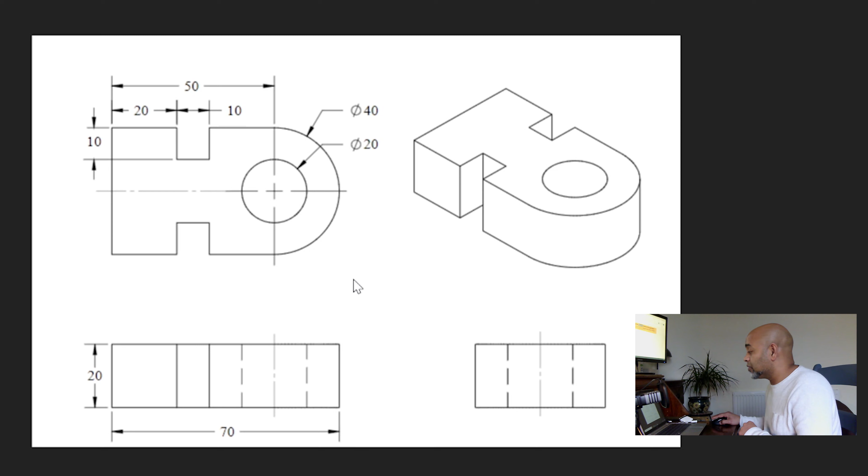I'm going to try and create a version of this whilst I'm running the screen capture for you. First up, I'm going to start with a new part file.

A couple of things about this model: depending on what you're trying to address, you have to select your sketching plane. In this particular case, I think we need our part to grow from the floor up like this, so any cross section you want to draw, you want to draw onto the top plane, and I can see anything I need to draw on the top plane is given by the top view right here.

Okay, so if I were to sketch that profile onto the top plane, I'll then allow it to grow up 20, and in the end, hopefully I will have a result that looks somewhat like this.

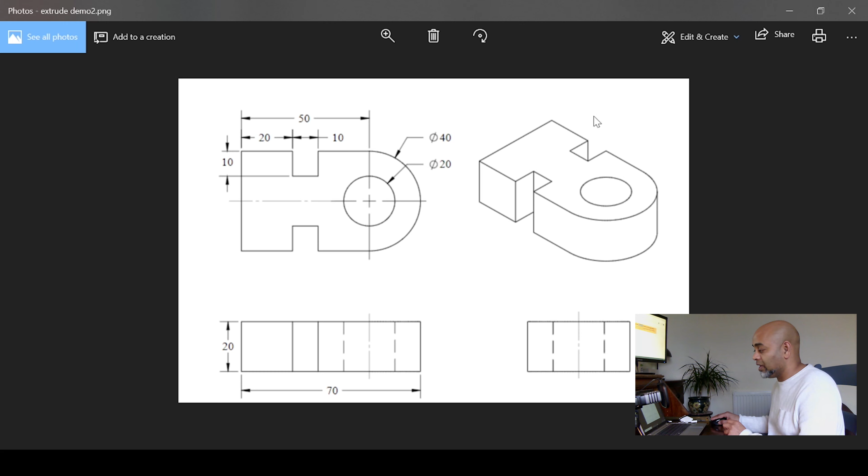I will leave this image hanging onto the rendered video when I finish. Okay, so I'm going to get rid of some of these planes that I don't need, and I'm going to jump on top plane. I know the origin is right there trying to help, and what I wish to do now is

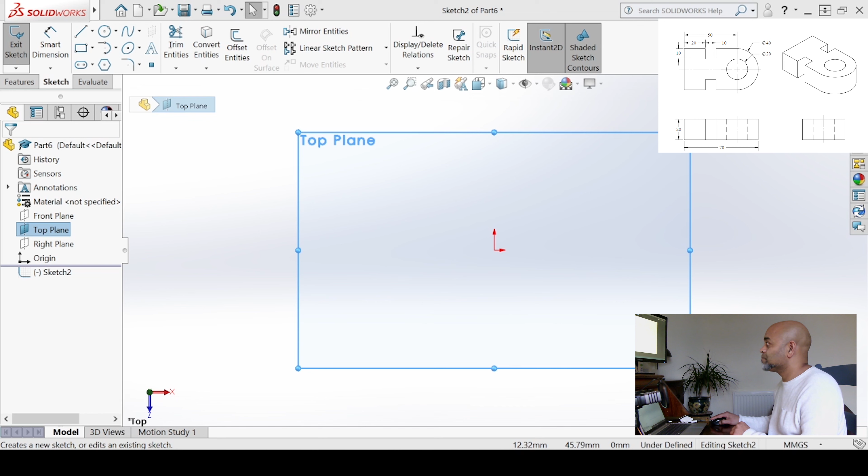sketch the circle, and I'm going to plant that onto the origin. I know the circle is meant to be 20 in diameter, 20 diameter. So that is cute. I like that.

I also need half a circle around here, which I can draw as half a circle, or I can draw a rectangle and fillet the corners out, whichever one you prefer to do.

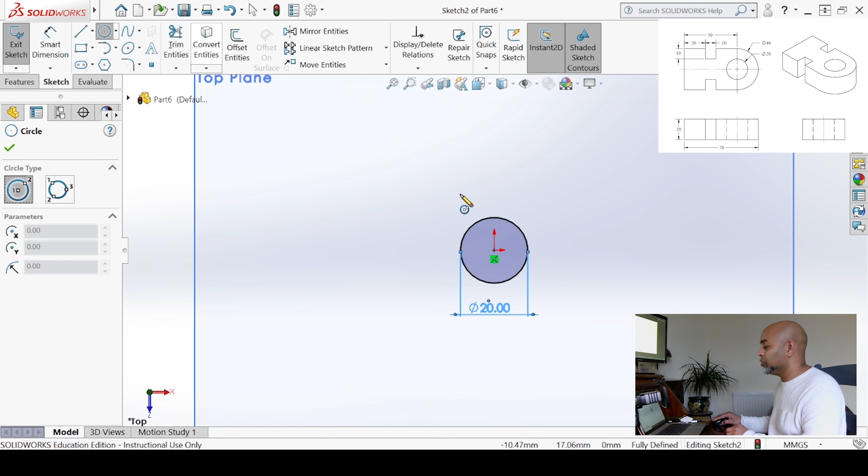So I'm going to go ahead and create a circle that is 40 millimeter in diameter, and then we'll think about chopping the bits which we don't need. So this is 40 mil diameter circle.

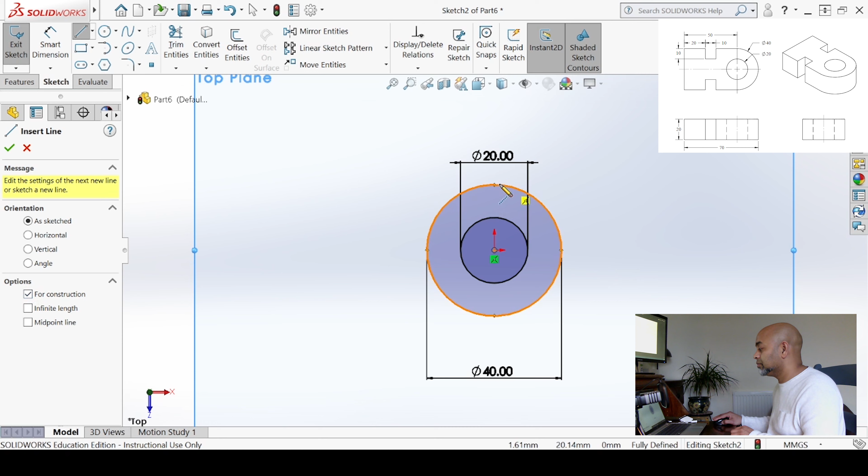Okay, I'm aware of the fact that I will need a construction line just to be able to create that intersection and remove that half circle which I do not really need. Okay, construction line can stay and it's not going to affect our final extrusion.

Now I wish to go ahead and draw myself a rectangle. Sorry, it's not a rectangle. I'm going to start tracing the profile like so,

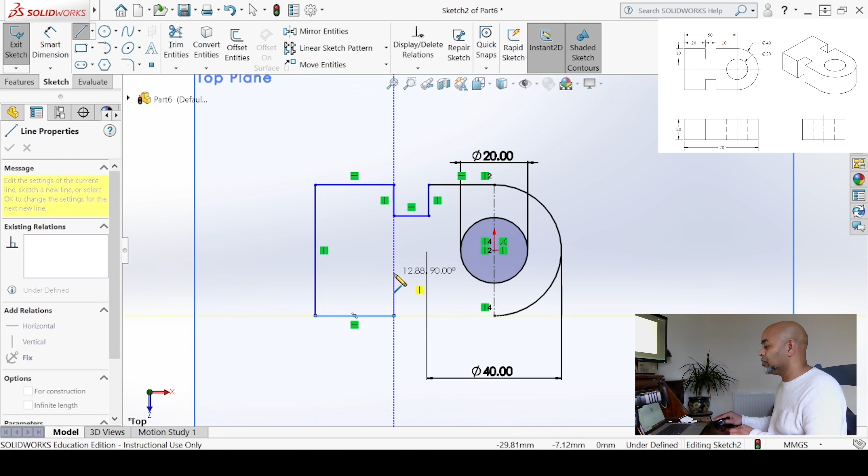without having to worry about any of the dimensions. But there are some things which I'm going to be mindful of. For instance, this, I'm going to commit to that curve relation, and I'm going to commit to this relation here, and all of this helps me draw a meaningful sketch.

As you can see, this is a closed contour. Now all I did is I used the line command and I literally walked around it, clicking wherever I want to click. This is not the final shape I need because all the numbers are all over the place. And now is the time to address those issues.

So for instance, I want the overall distance from the center to this end to be 50, and as you can see, it has readjusted itself to accommodate for that.

I wonder if I can bring these numbers slightly out of the way so I can make space for some numbers that are going to go jump in that space there. Okay, I know distance between these two faces is 10, so I'm going to go do that.

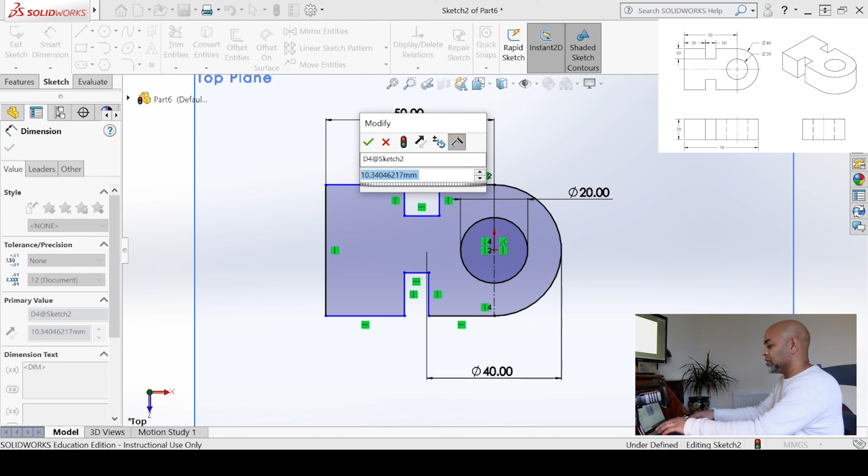I also know this is going to be 20, so I'm going to make it nice and in line with that 10 there as much as I can.

I don't need to worry about the overall height because that is same as the diameter of our object. Now there are a couple of things which are slightly off here. The fact that I haven't specified the depth of this cut, so I'm going to say

that is 10 millimeter. Now then, you may wonder, well, we have got all the dimensions, but it's not fully defined yet. Why is that? That's because I haven't fully constrained that.

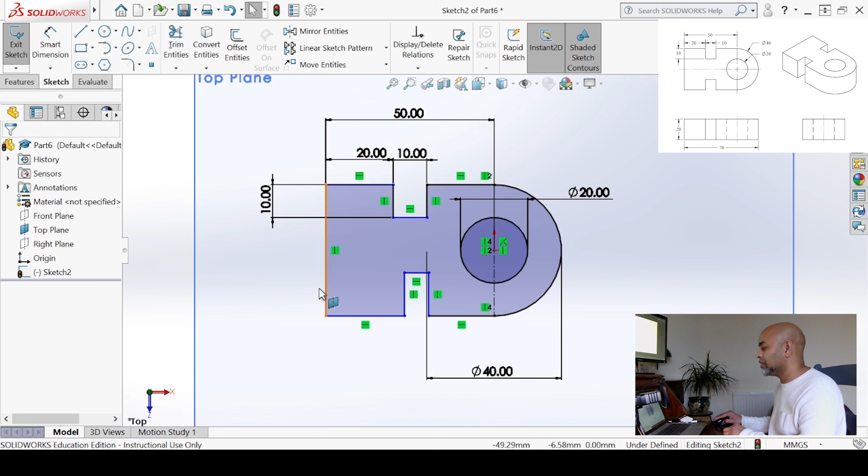There are a few unknowns here. For instance, I haven't finished detailing this end here. Let's do that now. How about if I were to say this line here,

holding down control, this line and these two little lines, they are equal in length. Excellent. So I've created that equal relationship.

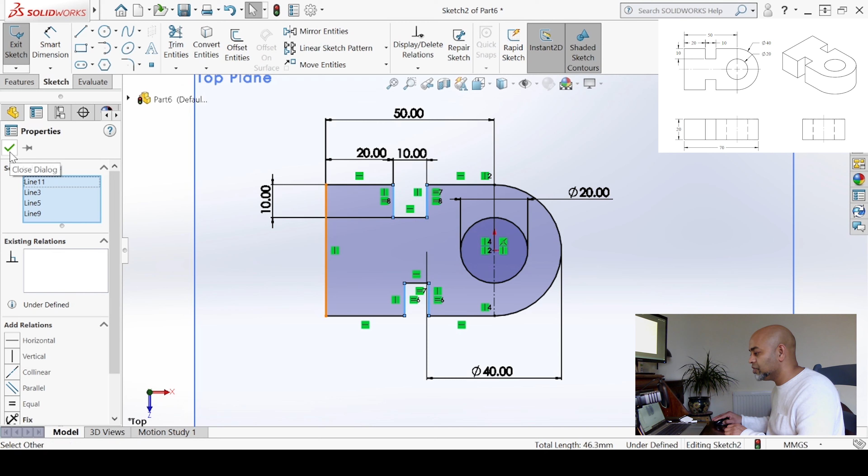Whilst I'm on the case, I would also like to make sure these two lines are collinear. So I'm going to select that line, control select the other line and make them collinear so they line up correctly. Okay, green tick to confirm.

And if you're still in doubt, you're always more than welcome to grab the blue line just to get a good idea of why it is moving or why it is undefined. And if I were to do that, it will be all clear. So I haven't restricted that line to stay under that.

So I'm going to go and do exactly that on this side here. Select that, control select the other end and make it collinear. Green tick to confirm. And if I look at the message here, that says fully defined.

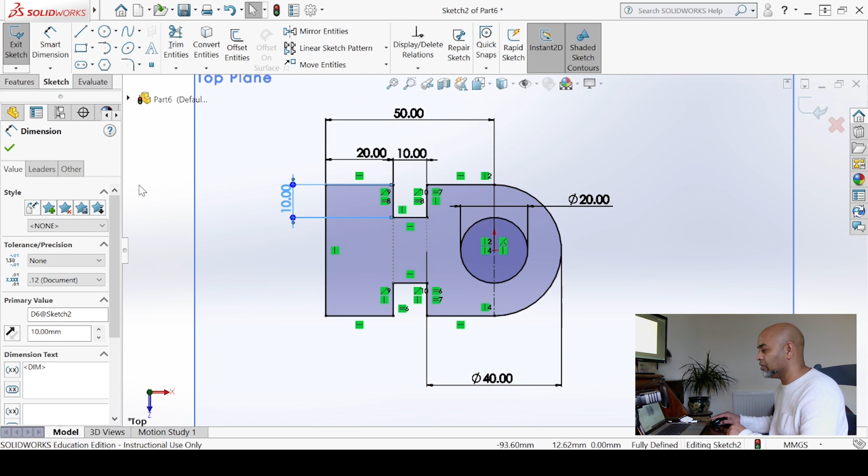What that really means is we've done a great job in terms of sketching this, probably slightly complicated because I was taking it slow with a step-by-step approach. I could have mirrored some of those, but we'll look at those in some detail later. For the time being, I think this is a good profile and we are good to extrude this.

Look at that. Extrude boss base. And I'm expected to pull it out of the ground 20 mil high, green tick to confirm, and this is the model I needed.

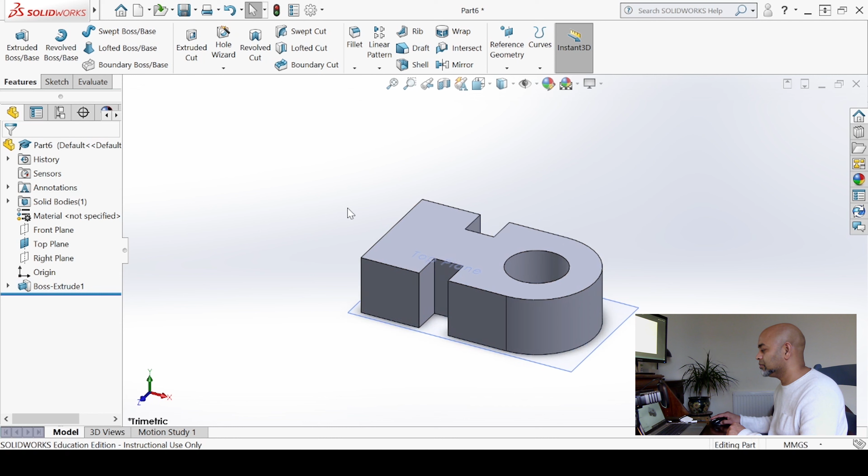Beautiful. I have one more example here that I would like to run with you. It's fairly straightforward. There is some thinking you need to do before you jump into it straight away. What we have here, as in the previous example, we have the three views of this solid part. So we have the front view with most of the numbers on it. We have the top view there, and we also have the right hand side view sitting in that space there.

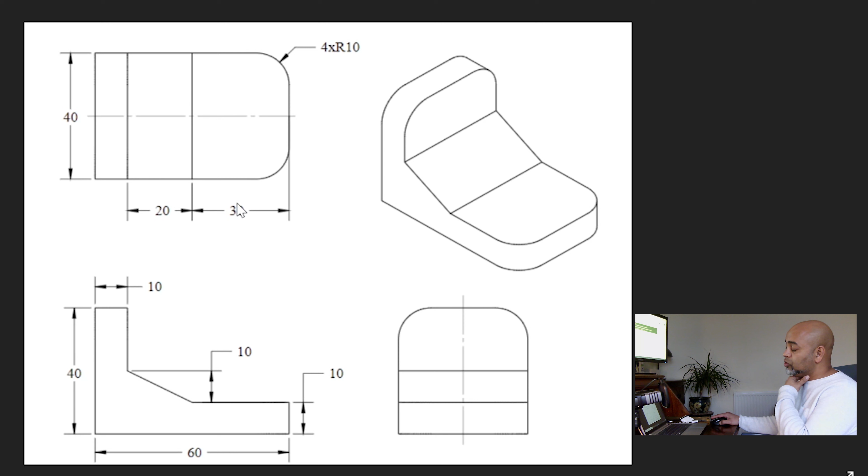Now, what's peculiar about this is instinctively you may want to start sketching onto the top plane, but that probably will not be a good idea, because the way I see it, I can see there is a cross section here, which is that L-shaped profile, which is shown clearly on the front plane here. Okay, so that's sitting on the front view.

So I would go and start drawing onto the front plane that particular profile, and then extrude it out like so, mid-plane extension, as you can see, and that will be probably 40 extension, and probably we can hit it with a couple of fillets, so maybe 4 fillets to be precise. And on this instance, we'll use a feature fillet instead of a sketch fillet.

Okay, so first of all, going over to SolidWorks, snapping onto our lovely origin, and drawing that profile. So going 40 across, 10, come down, sloping line, going across, coming down, coming back at 60. Hopefully all the numbers are there. If not, we can borrow some of the numbers on this side here.

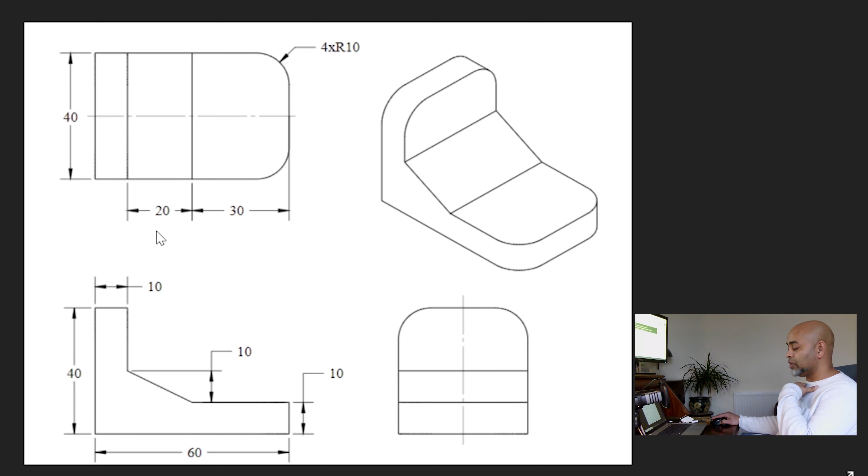As I said, the views are linked and they're related to each other, so there is no danger of getting that wrong. So I know from that vertex to the end here is 30 because it says so in the top view, and I know that sloping line is 20 long. Okay, let's head over to SolidWorks now. New part file. As we discussed already, this time I'm going to go on the front plane.

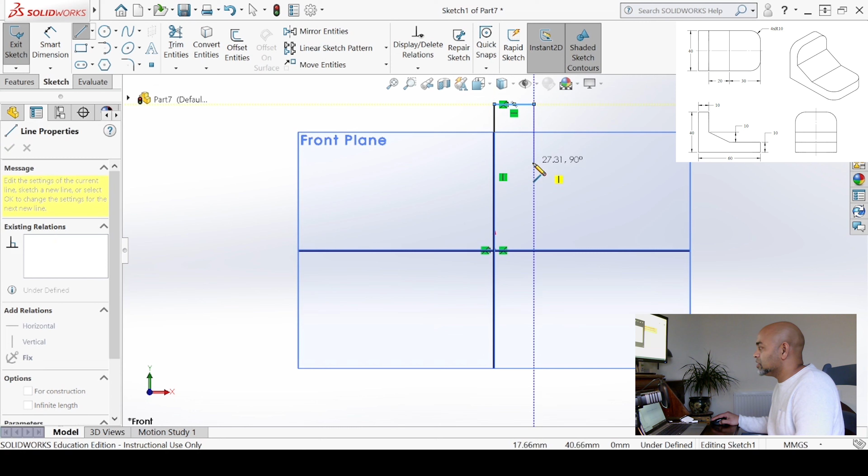That's my sketching plane right there. Whilst I'm here, I'm going to jump into the line tool and roughly sketch the profile without worrying too much about the actual dimensions in the first instance. Go across, come back down on the ground level, and click back. That gives us a nice closed boundary.

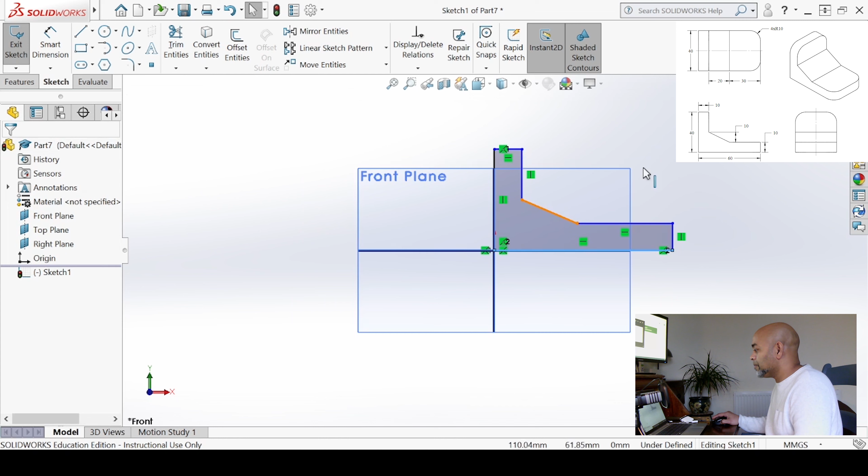Now it's time to get the numbers in. I'm gonna go and say this is 40. I was hoping it won't do that. It did. It's not a problem. Sometimes it will scale everything. Because I sketched it without the numbers to start with, it decided to not scale it down, and sometimes it will dynamically scale as well.

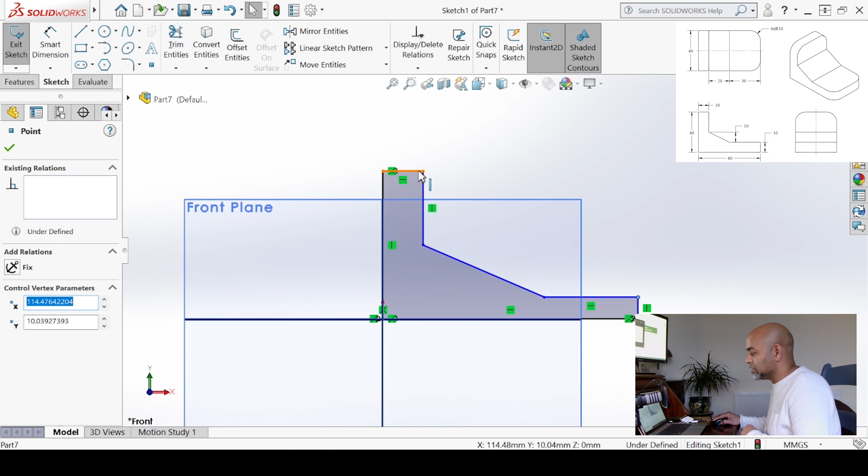So what I'm going to do is probably lower that before SolidWorks decides to break my model and bend everything out of shape. Okay, I'm going to give that a go again. Well, that's looking more like it, so I'm going to call that 40. Still morphed that profile way off. It shouldn't be a problem.

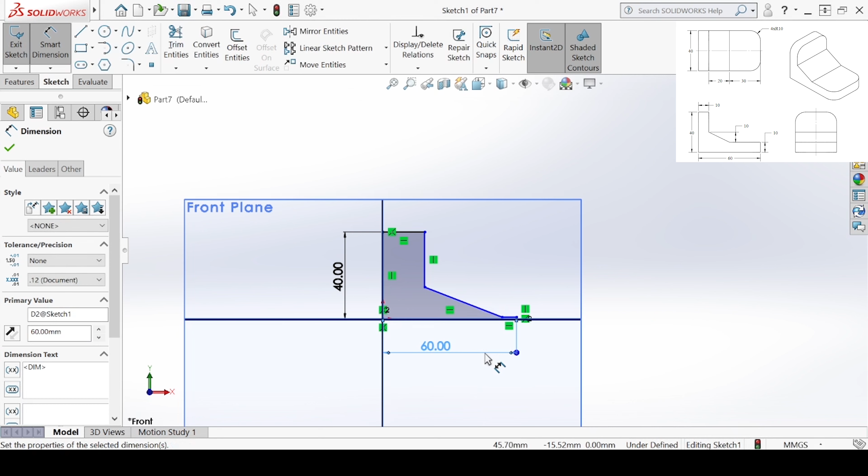This number here, right, this explains everything then. Okay, that's 60. This little detail here is 10. And so is the other end here.

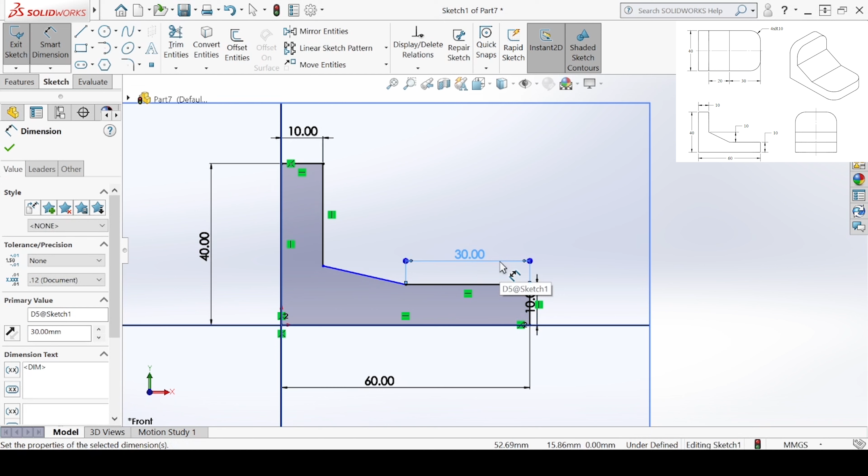Pretty good. This flat space is 30 as per the top view, and the sloping line is 20 across. That's not the length of it, but the distance between that point and this point here is 20. So I'm going to literally click on that, pull the cursor in the correct direction.

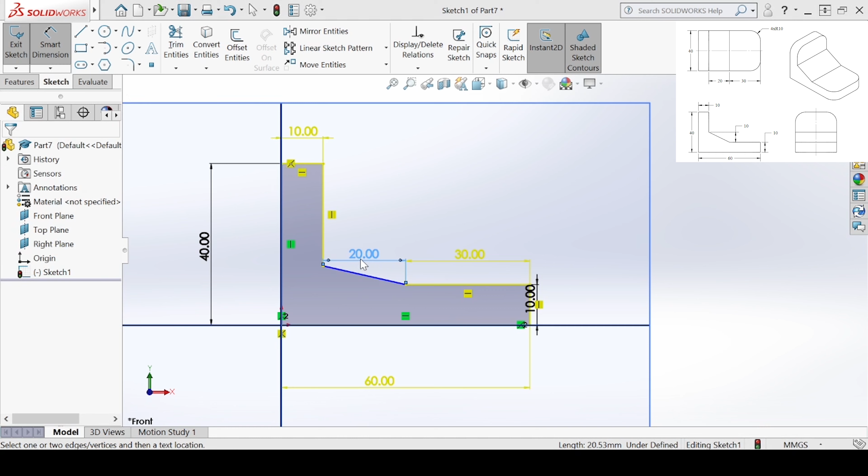If you go that way, you'll be specifying the length of the line. You just want the distance. I'm going to go and say that number there is 20. Now I have some errors on the screen, and I wonder what I did wrong here. I probably tried to over constrain this, because if I specify that to be 60 and that's coming back 30, then this is double dimensioning, so I don't think I need that 20. Okay, I'm happy to get rid of that.

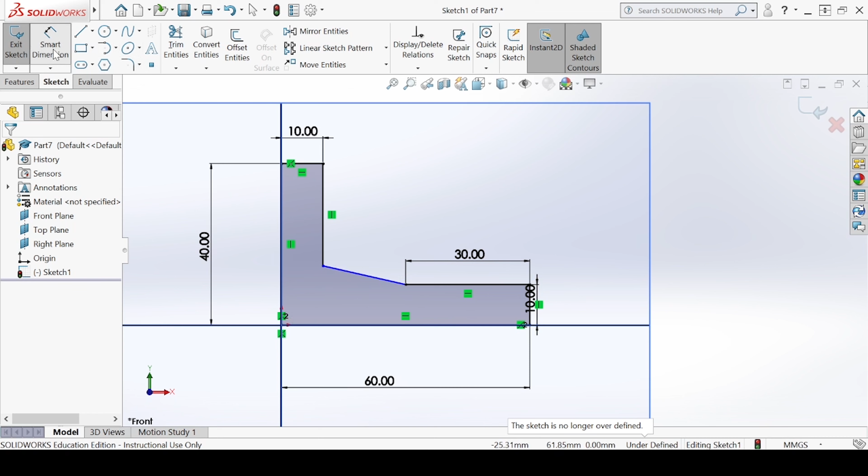Probably what I need to specify is the height of these 2 points. So I'm going to go and say distance between that point and this point here is 10, and then that constrains my sketch fully. It says here fully defined. Just going to make sure all the dimensions are sitting nicely and as centered as possible. That's looking good there. That's looking okay. 10, 40 around there, 60, lift it up a little bit, centered.

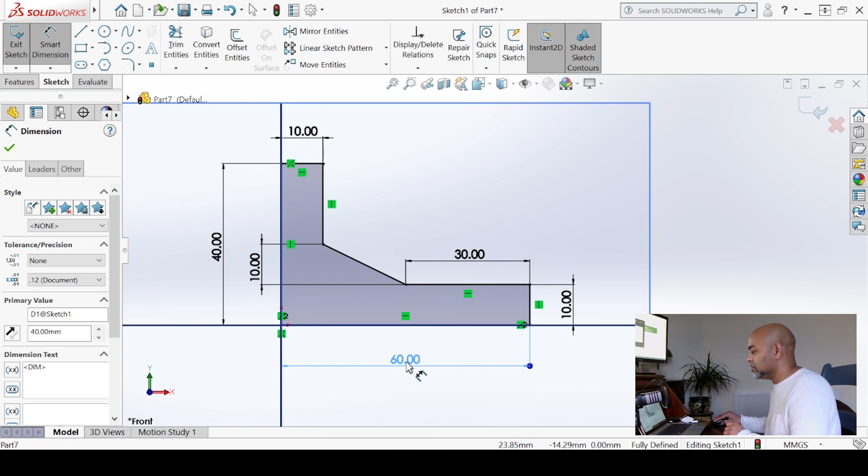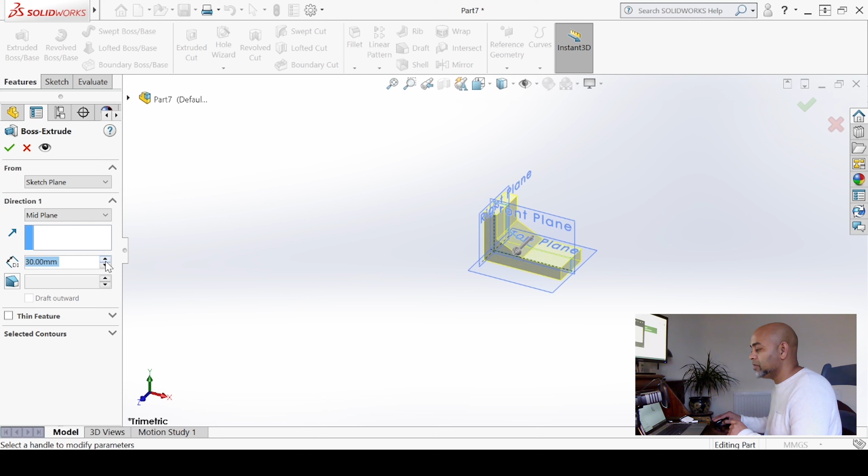Okay, once you're happy, you can exit the sketch, and I'm going to go extrude it out. Now looking at the drawing, I think I wish to extrude that mid plane, and the extrusion is 40 millimeter wide, like so. So I'm going to go ahead and green tick to confirm. I think we are nearly there. All we got to do is round off this edge, round off that and that edge.

Okay, and for that purpose we can use the command called fillet. This is very similar to the one we used in Sketch. However, this is applied as a feature after the boss you created. Very simple command really. All you got to do is activate that by clicking into it, and when the blue box is active, like so. And there are other subtypes, if you wanted a variable fillet, if you wanted full face and full round fillet, there are all types in there which we will look at eventually.

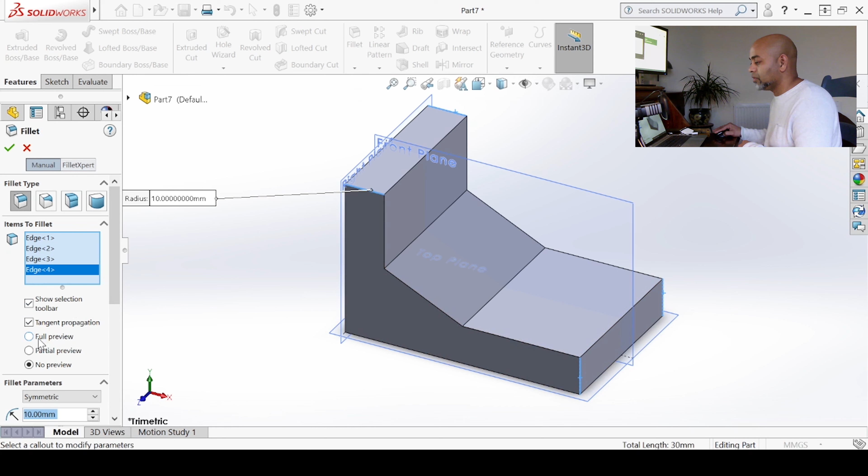What I'm going to do is, instead of worrying about all of that, I'm going to quickly plug in the radius I'm after. In this case, it's 10, which is correct. And I'm going to go in a series without holding down control or anything. When the blue box is active, I'm going to make sure that it's picking all the radiuses. Edge 1. That's the second one. Third. And the fourth. You can activate the preview. I can then confirm that this is exactly what I wanted. I'm going to go ahead and green tick.

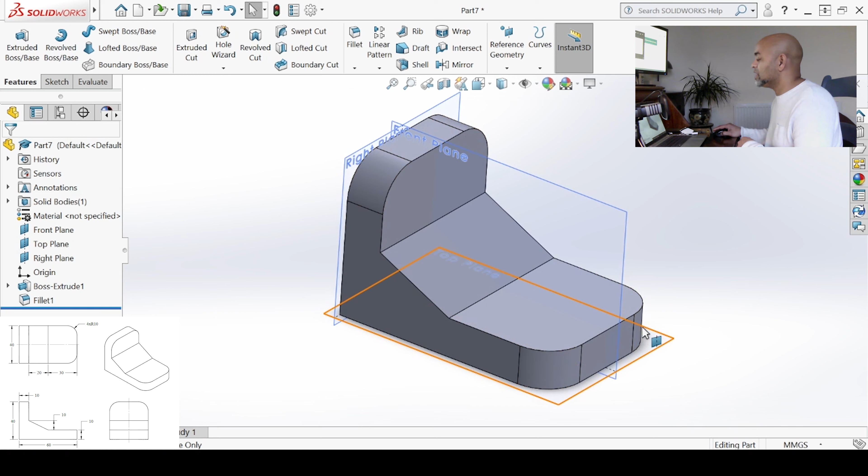And this gives me that part I was after. It confirms everything I want to do from the drawing. All the numbers match up. I have 4 of those 10 radiuses, and I have that profile which is sketched onto the front plane. So that profile sits onto this front plane here, 60 by 40, 10 millimeter wide. We got that's 30, this is 20, and that is 10 high. Okay, so this confirms everything. As you can probably see in the tree, for the first time we have 2 features, not just one.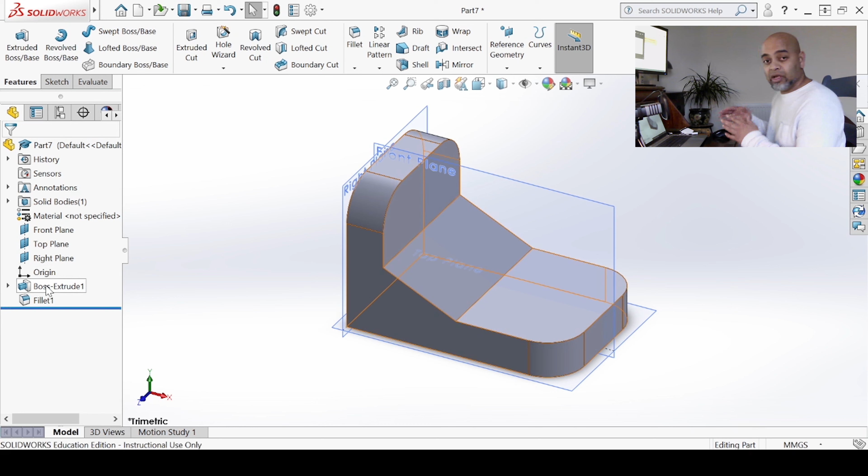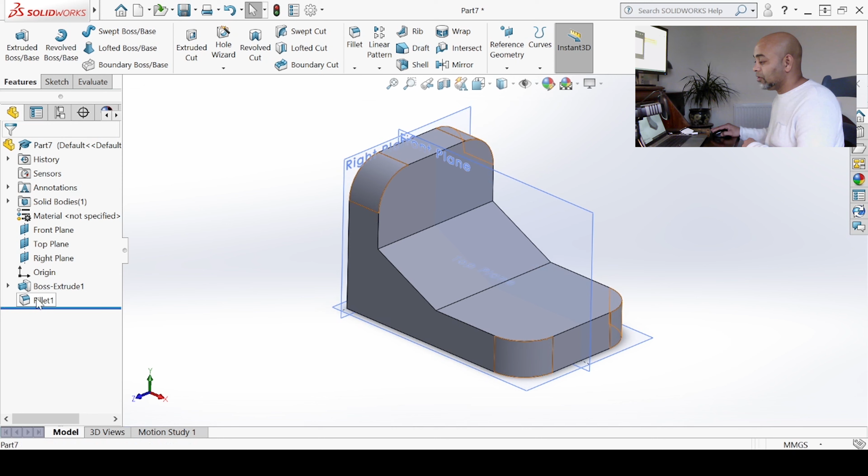So depending on what you want to edit, for example if you wanted to extrude it wider, you will have to go into the edit boss-extrude command, edit that, and say I don't want that to be 40, I wanted that to be 60. You can do that, and the radius will follow through. The fillet command will follow through, and it will dynamically apply that to the boss. Or in case you wanted the fillet edited, and you didn't want it to be 10 millimeter, you wanted that to be 8 mil, for instance, you can also do that by editing the respective feature from the tree, and that's the skill you will have to work on.

Okay, I'm happy with this exercise. It's come out really nice, exactly as I was hoping for, and I hope you enjoyed this too.